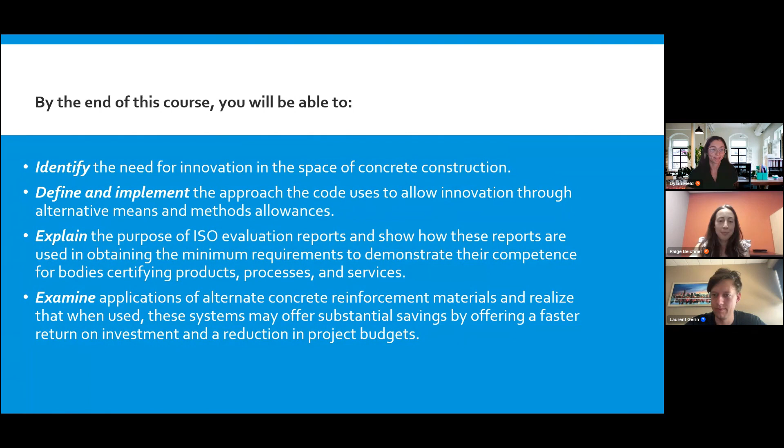Perfect. Okay, is everybody ready for the technical discussion? Because we are just going to jump right in.

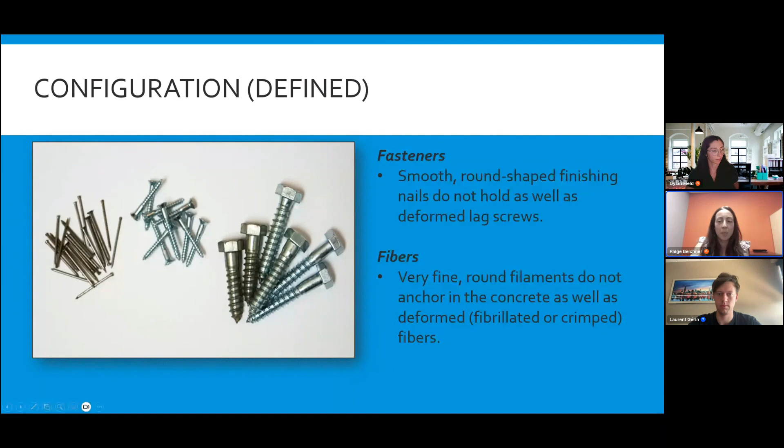To start off the technical slides, there are a couple things that allow fibers to perform better in concrete, and the key is to look for the deformation of the fiber itself. Both the synthetic and steel options are twisted. The synthetic is crimped as well, and the steel has a rectangular cross-sectional area. All of these features and deformations allow us to lock into the concrete better, similar to a screw in a piece of wood compared to a nail - it's going to really help hold things better.

Fibers definitely come in a variety of sizes. We can say very clearly that not all fibers are created the same. There's macrofibers, which I'm sure everyone is familiar with. We'll get into the micro, the macro, and then eventually the steel fibers - these three main categories.

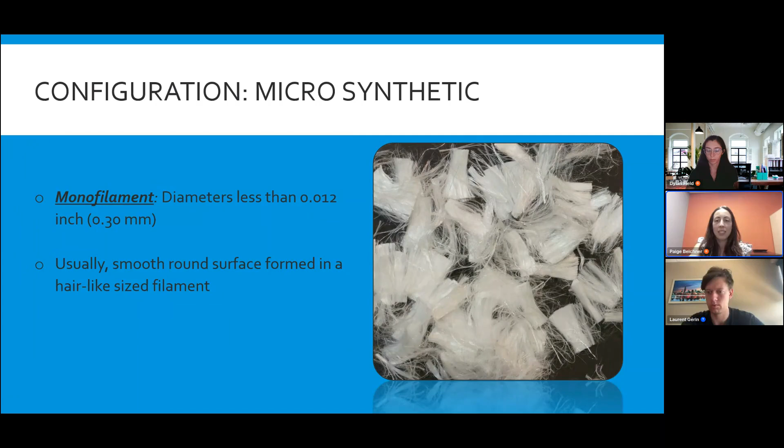First, talking a little bit about these micros. This is a residential fiber, typically dosed at 1 pound, and it's just used for plastic shrinkage to the surface of the concrete. These can come in a variety of sizes, all the way down to 1/4 of an inch up to 3/4 of an inch. These are things you would see a lot in flat work.

For the next category, as we get into more commercial projects, we have this fibrillated network fiber option, and it definitely will anchor better into the concrete, similar to a fishnet. As it pulls apart, we can see that these networks hold the concrete together. This is what can be used to replace some light duty mesh - super light duty, we would dose this around 1.5 pounds, and there are two standard lengths, 3/4 of an inch up to 1.5 inches. Essentially we can replace very light duty wire mesh, strictly there for maybe temperature and shrinkage control.

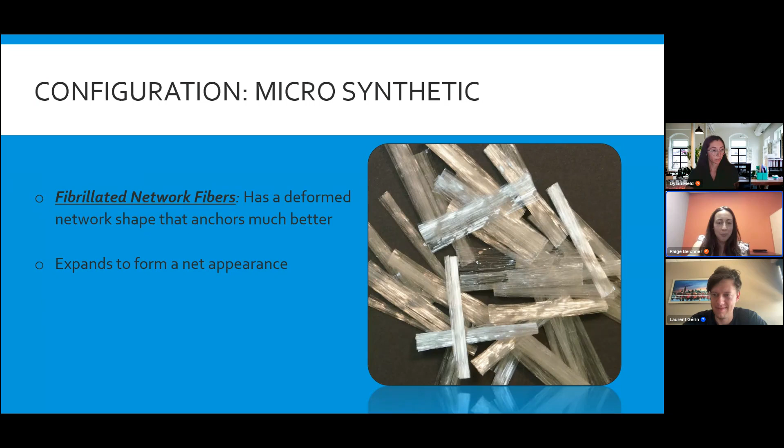And if anybody happens to have questions on where this would best be used, feel free to write it down. But where we definitely want to talk a little bit more about, and things get a bit more exciting...

...and we can set ourselves apart better with our macrosynthetic option. This is our bread and butter, known as a structural fiber. This can be used to replace essentially all mesh, including heavier duty mesh, for temperature and shrinkage. The macro can also replace lighter duty rebar as well - of course that will depend on the exact bar spacing and sizing, but whether it's a single layer replacement or a double layer, we're going to be dosing these anywhere from 3 pounds to 7.5 pounds on slab on grade, pavements, slab on metal deck.

What is important to note is that when you are able to replace some of these mesh and bar options, you are going to be paying less for the material costs. But where things really start to pay off is the fact that when you are on site, you do not have to lay down that mesh or bar anymore. This fiber would be mixed in at the plant and finished at that point. Honestly, the time and labor is where these types of fibers really start to shine.

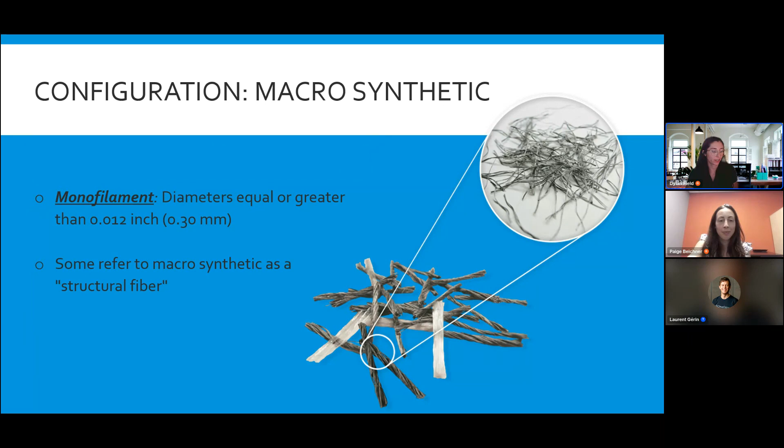So now we're into the steel options. The product that we offer is a twisted steel micro reinforcement, which is a little bit different than some of the other steel fibers you may see on the market. Ours is a high strength steel, so on average it pulls around 246 KSI. It is zinc coated, so corrosion resistant. This fiber is an inch long and 0.02 inches in diameter.

The name of it gets it from its geometry - 25 millimeters and then 0.5 millimeters in diameter. It does have a rectangular cross section, and it has at least one full 360-degree twist per fiber. All of the steel products that we do is made in Michigan, so it is an American product, which can be beneficial for certain types of work.

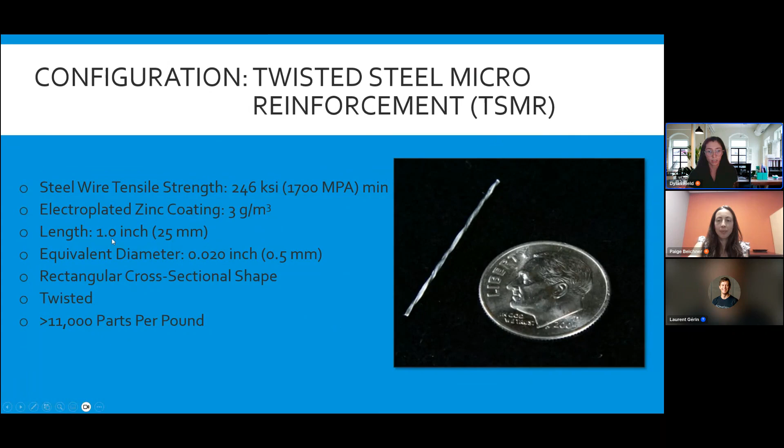So how do we get products like these incorporated into projects?

On the steel side, if you look at it in the light of the hierarchy of the building code, ever since we pulled from Australia, we are offering more of a performance-based solution. So we are complying with the objectives and functional statements of the code, but doing it with performance-based data through our evaluation reports. We have two: our IAPMO report and our ICC report. They are a little different in nature and cover different applications, and we'll go through those so you have an understanding. But they do comply with Section 1.10 of ACI 318, the consideration of alternative construction materials, design systems, and construction methods.

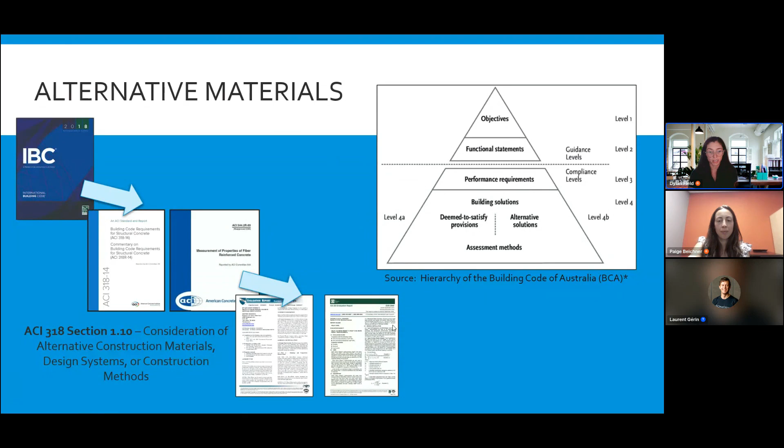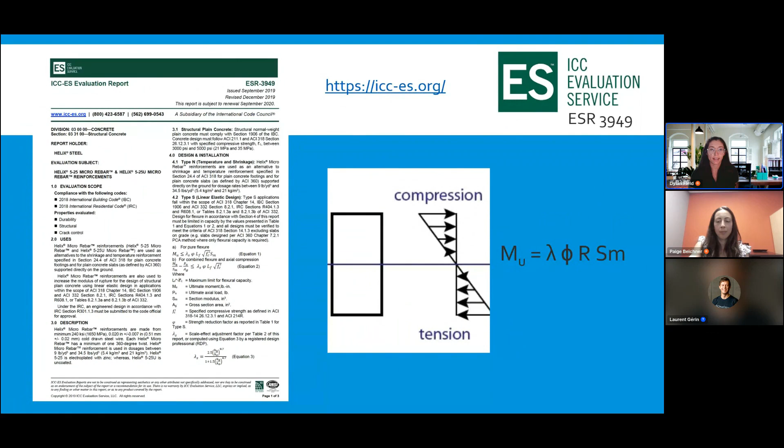Okay, so the first report we'll talk about is our ICC report. It's a little newer, and the information in this report is based on the fiber actually increasing the modulus of rupture of the concrete it's mixed into. So this is the report we like to use when looking at plain concrete applications, slab on grade, or footings on grade. Any kind of application like that, this is the report we'll typically design those dosages with.

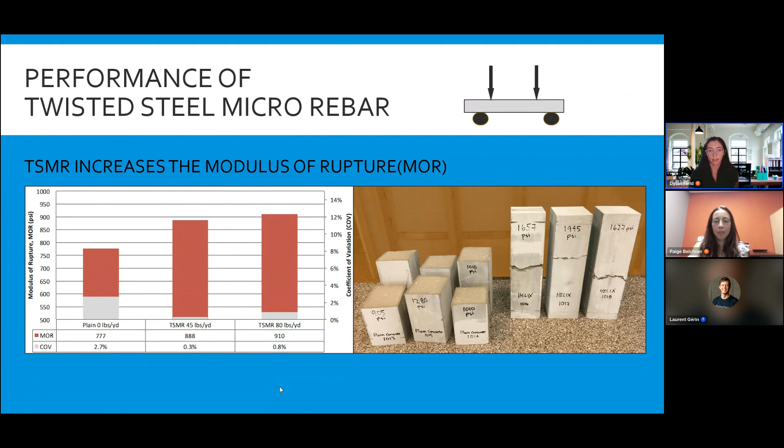These are a few of the beam tests we've used to determine the values listed in the report. What you can see is as the dosage of the twisted steel micro rebar increases, so does the modulus of rupture of the concrete. Typically when doing a plain concrete design, you'll use about 5 times the square root of the compressive strength of the concrete. When using a dosage of twisted steel micro rebar or steel fiber in this case, that can increase to anywhere between 9 and 12 times the square root of the compressive strength. So you do get a significant increase in capacity.

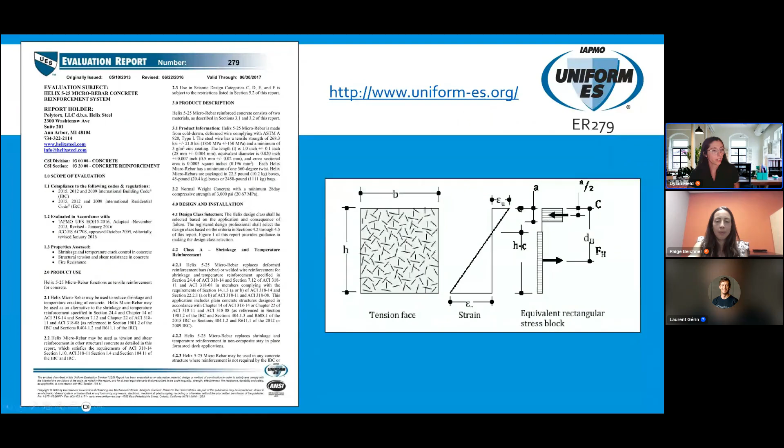The second evaluation report, which is also the original one we pursued, is the IAPMO report, and it focuses on a direct tension approach. We do a test where the specimen looks sort of like a dog bone, and you put two anchors in each end and then pull it to see what the maximum load is you can apply to a specimen with whichever dosage of fiber you're testing. The whole behavior of this test goes back to the geometry of the fiber. Because it's twisted, it behaves more like a screw instead of a nail, so you need substantial force up front to get it to start untwisting versus just having it slip out of the concrete like a nail would.

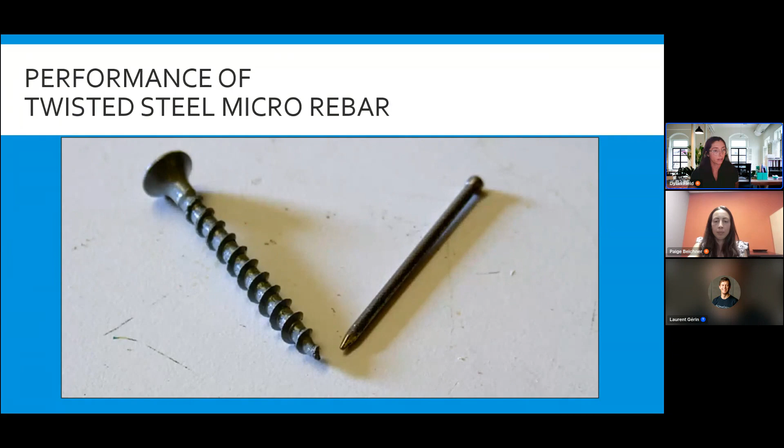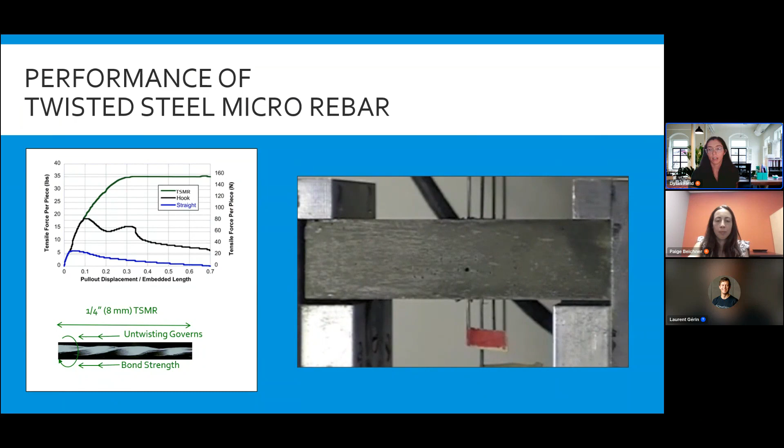If you look at this video on the right, you can see we have anchors attached to a fiber. Watch that flag and you can see it untwist in real time as load is applied. This graph on the left shows the different behavior between a twisted steel micro rebar fiber, a hooked fiber, and a straight fiber. You need significantly more force to pull a twisted fiber out of a concrete specimen than a hooked or straight fiber.

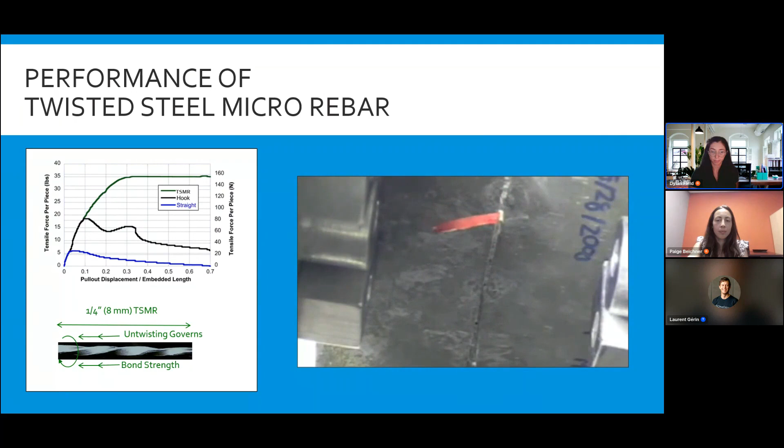Oh, who's that? What is happening here? Are we going crazy? Bear with me, it's something about this slide 19. Okay, can we see it?

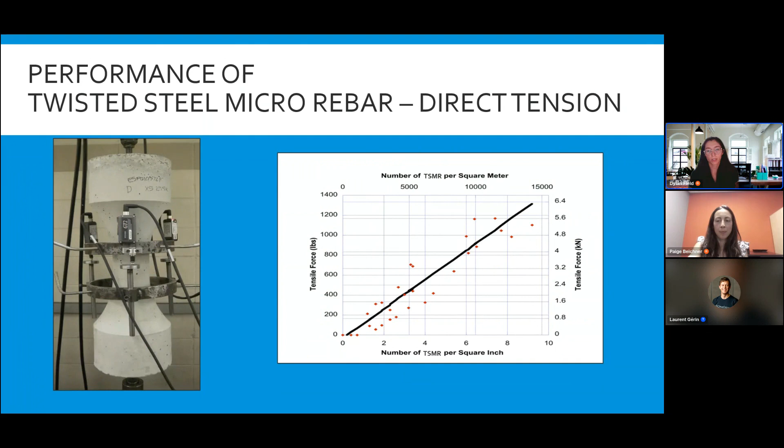This is the dog bone test. So this is where we take certain dosages of the fiber and mix it into the specimen you see on the left, and then those two anchors, one on top and one on the bottom, pull to separate that specimen and see when it cracks. As the number of fibers per square inch increases, so does the force required to crack the concrete specimen.

That was a lot of work to get that slide through. What is going on? All right, let's try. Okay, can you see it? Perfect. Okay yes, so we'll work through this quickly since we don't want to lose it.

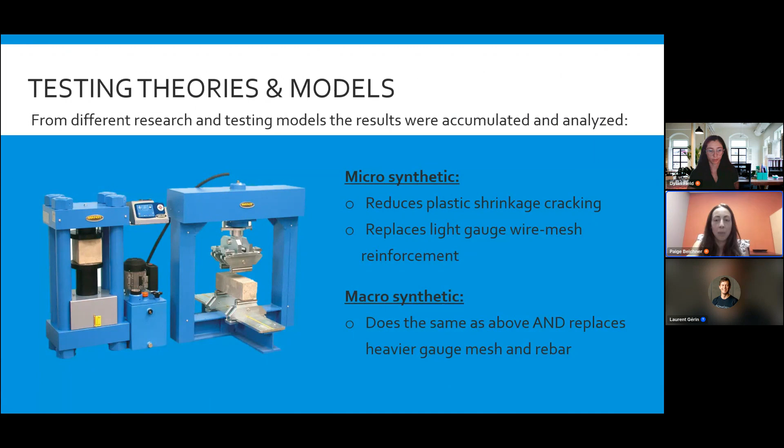Oh my goodness. Okay. I do it every time.

We do have an evaluation report for this product as well. This one essentially shows that we're able to increase toughness and get better ductility. When we have a 3D matrix of fibers in a homogeneous mix, you'll definitely have improved ductility. Abrasion resistance goes along with pavements and slabs, and some of the other bullet points help with exterior concrete applications. It will definitely be an improvement from those two levels.

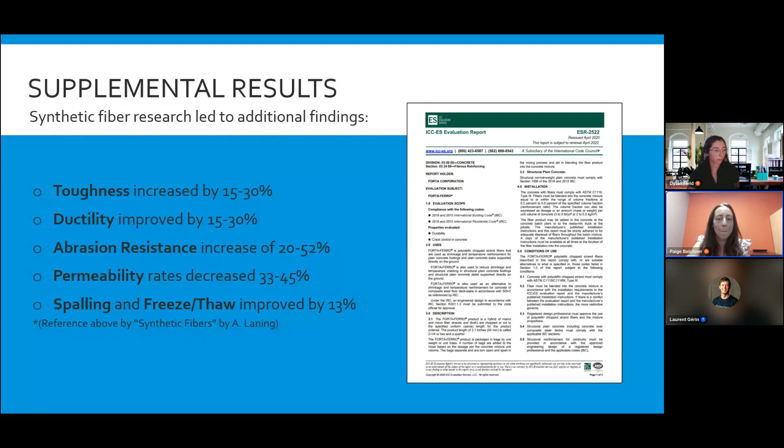Oh, it was funny one time, but it's not funny anymore.

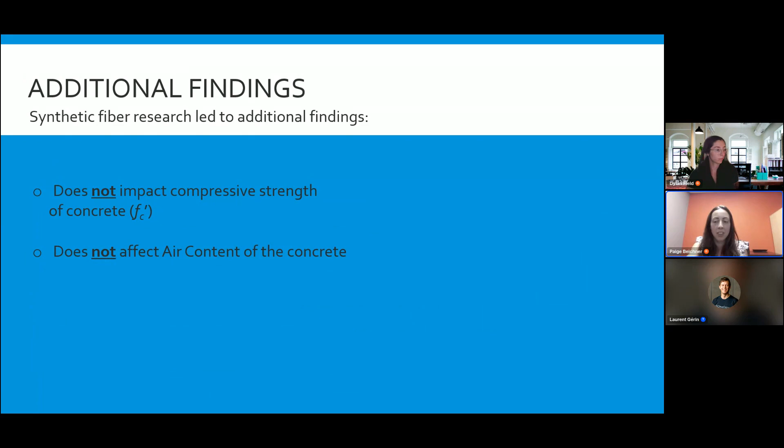It's important to speak to a few contractor benefits, because as engineers talk with owners or other clients, if they ask why fibers matter, here are a couple points on why they're important and can bring benefit to a project. First, increased job site safety—there's a lower chance of tripping over hazards such as wire mesh or bar. You'll also see decreased hours on the project.

When it comes to the cost of fibers, it might be a little cheaper or roughly one-to-one material cost compared to steel. But the real savings come from removing the labor needed to lay mesh, tie bar, put things up on stools, etc. We're taking out a huge aspect of the project where the pricing lies, so the site is prepped and it's as easy as just laying the concrete and finishing it. No extra man hours there.

As for whether workability is a factor or question, there's really no difference in workability. We'll have guys on site to help with any questions that might come up while they're putting the mix together.

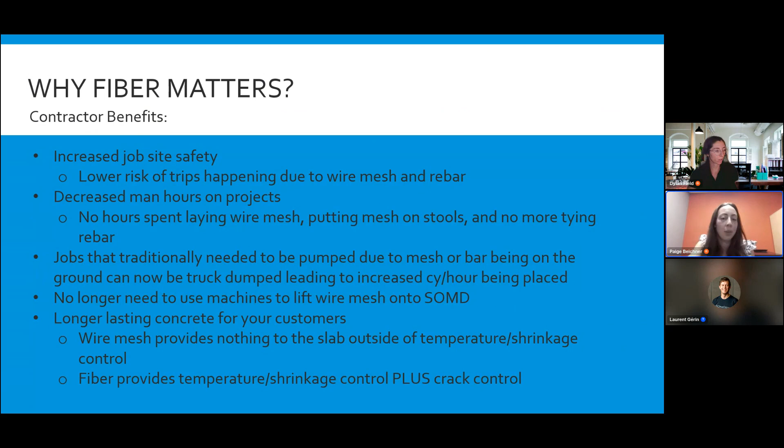Real quick, we have a question: is there any data about the corrosion resistance of steel fibers in harsh environments, and is there a standard test for it? While we don't have a standard test for it, we do have many case studies about steel fibers being used in brackish and saltwater environments, and also in concrete with constant heavy machinery and scraping of the slab. If that's something you're interested in, we can provide that information—we have examples listed on our website.

To make sure everyone fully knows what our company is capable of in terms of solutions, we have a whole engineering team able to provide calculation submittals, and we have the ability to stamp in all 50 states. So if we need to treat something as a delegated design—not that we're taking over as engineer of record, but we can easily do that design—please send us any projects you want us to look at for straight-up conversions, where we take the original mesh or rebar and give a fiber dosage for it, or we can look at things from a load-based design.

If we're looking at a project from the back end—say a contractor sends something in wanting a conversion—we'll put together a full calculation package for the contractor to submit to the EOR, and provide any assistance needed with building official questions or anything like that, to make sure it's a smooth process. And if we do it in reverse, assisting the engineer on a design, we're happy to provide those same calculations and help answer any questions on the front end. We don't expect anyone to do these designs on their own—that's what our engineering teams are here for. We know everyone's busy and nobody has that kind of time, so we want to make sure everybody knows those are services we offer.

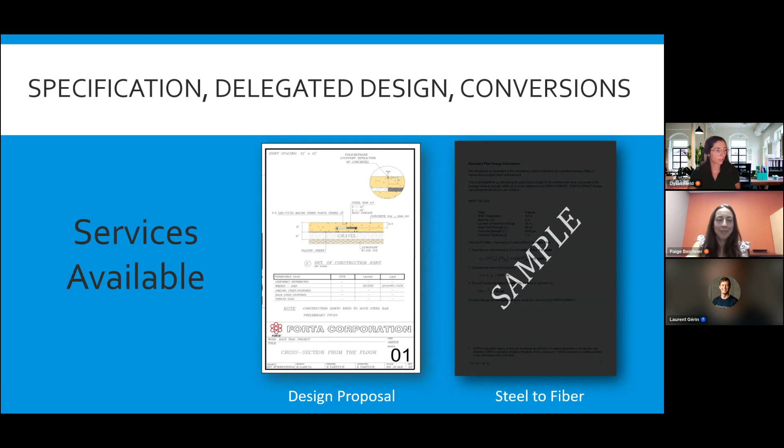Okay, some project examples. The first ones we'll go over use steel products, and then we'll hit on some synthetic fiber examples.

So this project was close to our hearts in Michigan, in Detroit. This was on a skyscraper project, the first skyscraper permitted in downtown Detroit since 1979. We were able to go in on all of the elevated decks and replace the wire mesh that was originally specified, and they were able to pump the concrete with the steel fiber, no problem.

That's a question that's sometimes asked, but the fiber is not much bigger than the largest aggregate. So if you can pump the aggregate, you can pump the fiber.

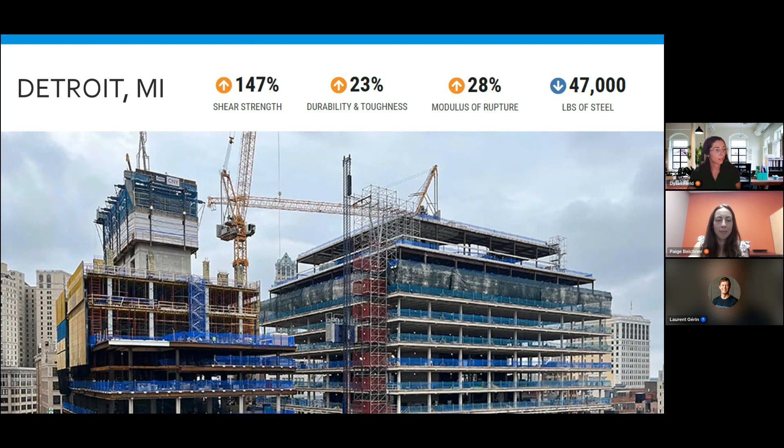Another cool application we got to do were the piles for the Ferris wheel in Seattle. I actually got to go on it and ride it before I ever worked for the company, and I had no idea, but it's cool looking back.

These are steel encased piles, I'd like to add, so nobody gets too excited. We were able to go in and replace the eight number 6 bars and the number 3 hoops at 12 inches on center entirely. All that's left is one number 6 bar down the center of each pile, plus the steel fiber. So it saved them quite a bit on installation.

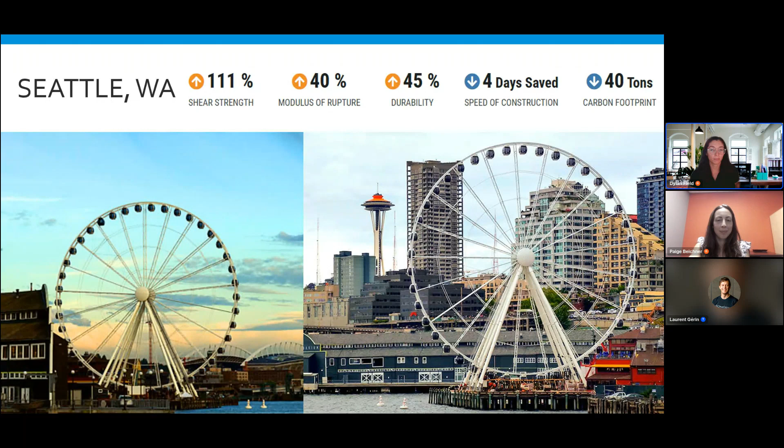Then a type of project that we do, I'd say it's probably our bread and butter, is large scale distribution and warehousing, heavy industrial slabs.

This is one we did in North Carolina. This slab originally had two layers of number 5 bar, one top, one bottom, at 12 inches on center each way. We were able to go in and fully remove all of that bar so that all they had to do was mix fiber in and go.

So approximately, for every 10,000 square feet of slab you're doing, you'll save a day by switching to a fiber option. So if it's a tight schedule, it really can be beneficial.

Then this was a large project in Ohio, about 3 million square feet of slab, so quite a bit. There were 3 different thicknesses, and we were able to work with the engineer on the front end to determine 3 different fiber dosages so that they didn't have to mess with the rebar.

Something I like to add is when we go in and look at projects, we try not to ruffle feathers. We want to keep it as similar to the original plans as possible. So if you think about control joints, for example, we aren't going to change them unless we really have to. On this project, we were able to keep everything they had and just give them our dosage, to make it as streamlined as possible.

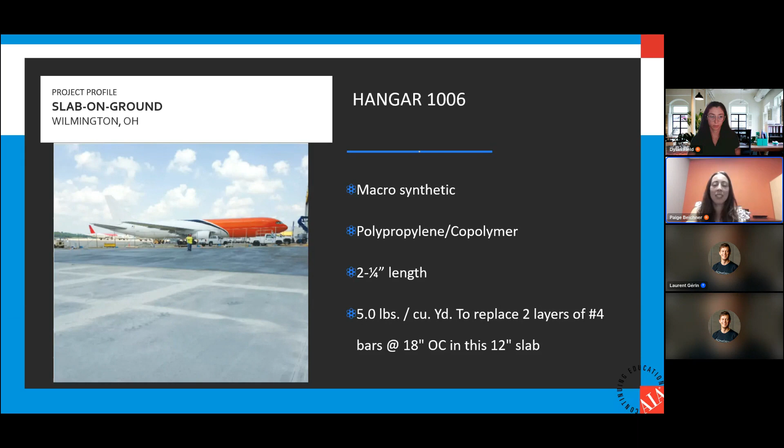This was originally spec'd in with 2 layers of number 4 bar. Ultimately, this made for easier placement for the contractor, saved the owner money on material cost and man hours, since they didn't have to tie 2 layers of number 4s. Some of these benefits would probably be consistent across a lot of these project examples.

For this next one, just another hangar option showing how we can put an epoxy on top as well. Keep in mind we can do up to 7.5 pounds of dosage with these macrofibers. They're dosed anywhere between 3 pounds and 7.5. Anything over that amount might get hard to finish.

So we would consider a steel fiber at that point, and Dylan might take over the project. Typically for workability and constructability, we will recommend the steel fiber if we're getting above that 7.5 pound dosage on the synthetic side.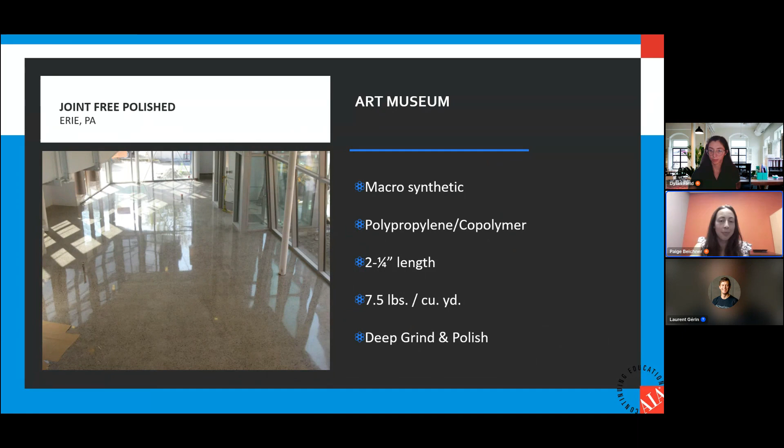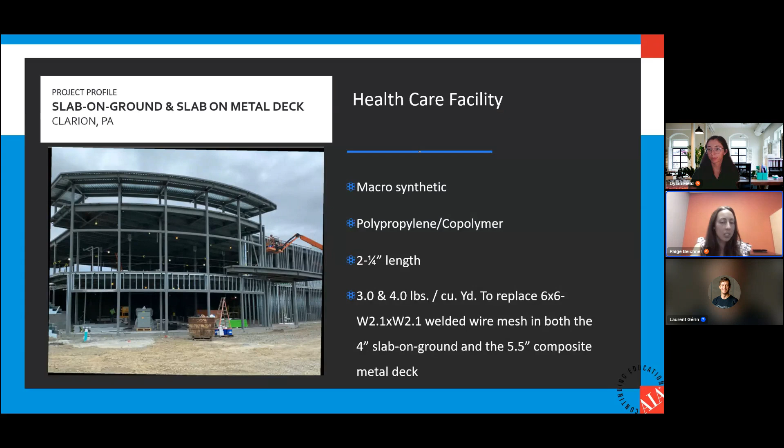For this healthcare facility, it touches on both the 3-pound and 4-pound dosages. The 3-pound was to replace the mesh in the slab, and because it was slab on metal deck, it became a 4-pound dosage rate. Something convenient for the contractor is they don't have to bring that wire mesh into that enclosed building, making it a lot easier. You're not paying for guys or equipment to bring that up onto the metal deck.

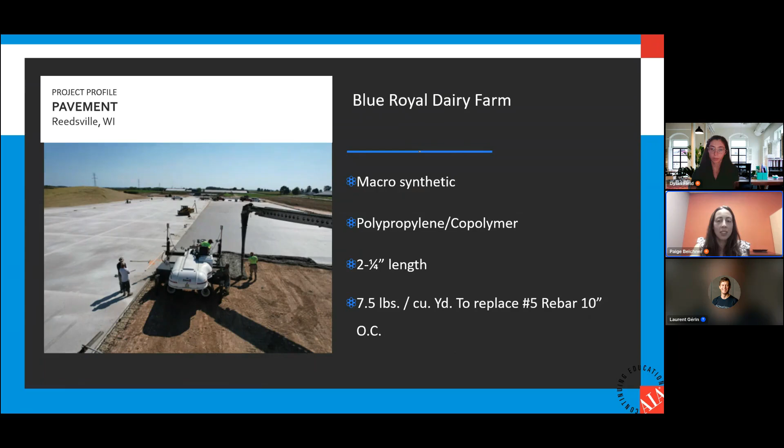For this last example, it was a bit more unique, an irrigation channel. Again, big time savings. We're getting more longevity and more durability in this concrete for these channels as water and debris flow through. All of the benefits I've previously walked through are going to apply, and at the end of the day they were able to get a much more durable basin by implementing with fibers.

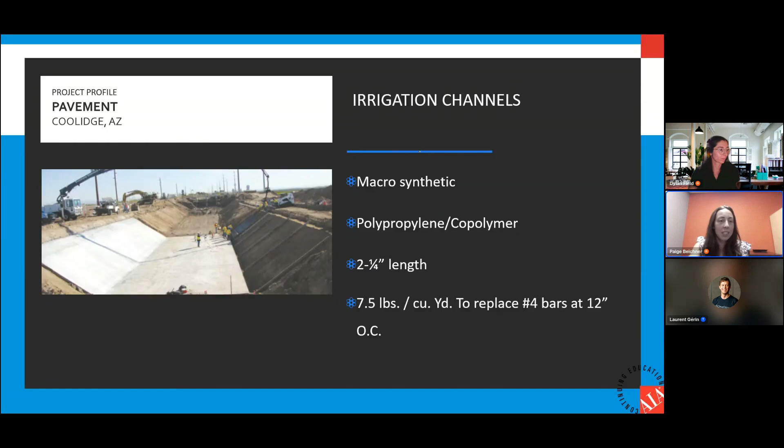Hopefully these examples gave you guys a little bit better idea of how they can actually apply to real world examples.